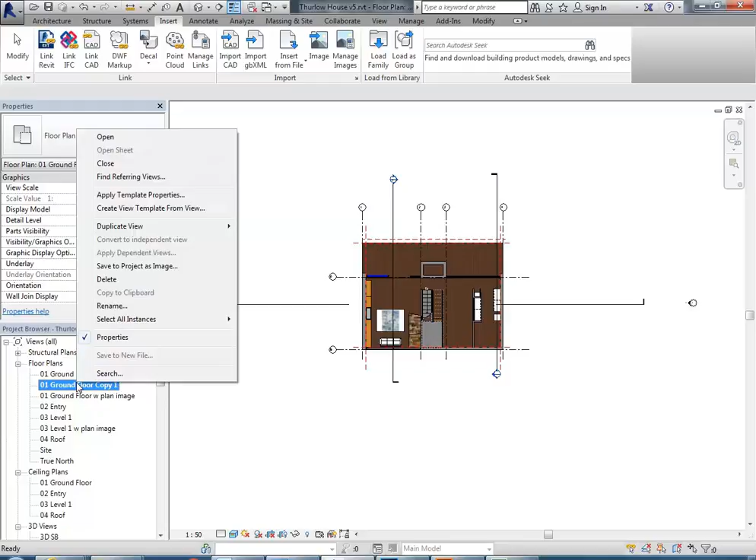So I'm going to right click on my new view name and rename it - why not use a name that is going to work on the sheet. So ground floor plan might be a good one. If you've been wondering if you need to have the view name that shows in your project browser show up on the sheet, you don't. There's an option to have a different name on the sheet to the view name, and I'll show you that as well.

Okay, so I've got my name, and now I'm going to hide - so my grid lines, for example, can be hidden. We don't really need to see those on the plan, so hide in view category.

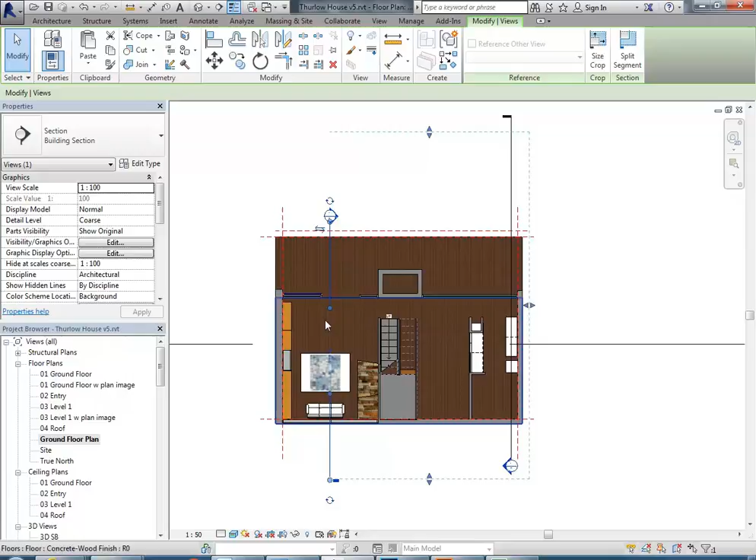My sections, I'll want to keep, so I want to have some sections, and the ones that I'm going to keep, like this one here, I'm going to make look a bit nicer so that they read well on the plan. So just by stretching the grips there to make it look a bit more presentable.

And maybe I'll keep this one as well. So any sections you're going to keep, you should tidy up. And this is important because you don't want section lines sticking out and making the plan way bigger than it needs to be. So you want to get those in close to the edges of your drawing.

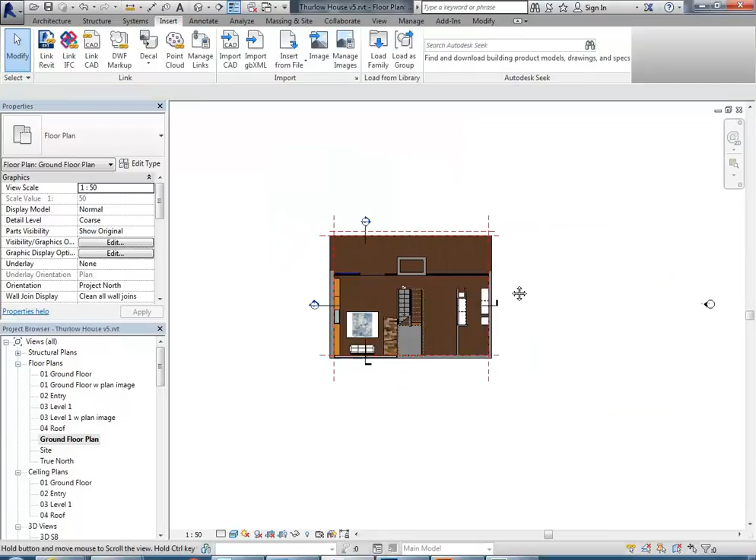And then any sections that you don't need to show on your sheets, you can just hide by hiding in view elements. Now for interiors projects, elevations are very rarely shown on the plan, so you can just hide the whole category for those.

And then my reference planes, they won't print, but again I'm going to hide them just to make the view look cleaner.

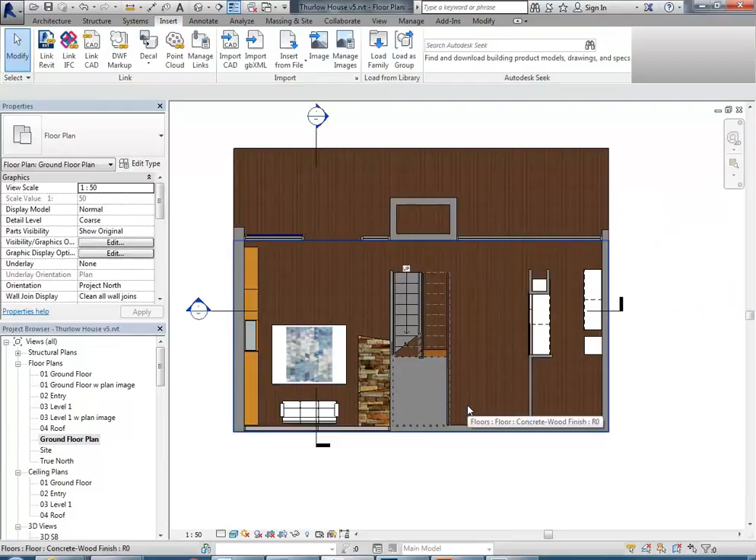A few other little things. You can label in Revit. Now, you can do this in those other programs as well, InDesign, Illustrator, Photoshop, any of those you can do your labeling. But for just simple room labels, Revit isn't bad. But make sure you use the Annotate tab, not the Architecture tab. The Architecture tab has model text, which is basically 3D text. So never use that to do your labels.

Use the text on the Annotate tab. There you've got a text tool, which is just regular text for things like labels. And then over in your properties, you'll see that you have set up a lot of different Arial sizes. I'm pretty sure you'll have come across that Arial font before. Do you know what Arial is?

Yeah, it is a Microsoft thing. It's like a poor man's Helvetica, essentially. So it's a bad rip-off of Helvetica. Unfortunately, you don't get Helvetica on Windows because Apple did a deal with the people who produced that font and stopped them from releasing it more widely. But you can pay for it and easily have it on any Windows platform. It's pretty simple actually, and it doesn't cost you that much. You might even find some free ones, but the ones you pay for are a lot nicer. And it's much nicer than Arial. Arial is a bit of an ordinary font.

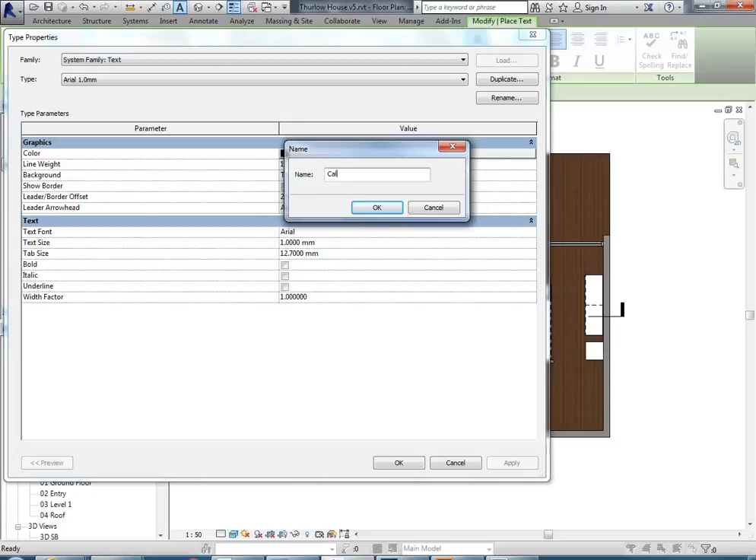So if you go to Edit Type, then you can easily set up any other font. And there are some nice fonts that come with Windows. And so to do that, just go to Duplicate. Anyone know any nice fonts that are better than Arial that you might use? Yeah, Calibri's alright, yep. I don't mind Tahoma, Myriad, there are a few that are good.

So, Times New Roman, yeah. Serif fonts, I don't know, they're good for emphasis, but otherwise, for things like this, I tend to avoid anything with a serif. So that's the tails on the end of the fonts. And it's important for design drawings, you really do need to think about all of these things like your fonts.

I'll say Calibri, and I'm going to make it 3.5 mil. And so I'm going to set the size there, 3.5. You might think, well, why am I spending so much time with text when I'm really trying to get the scale? But you'll see if it's not obvious why scale and text go together in a second. So here I'll set that font, so we'll go with Calibri, that's not a bad one actually.

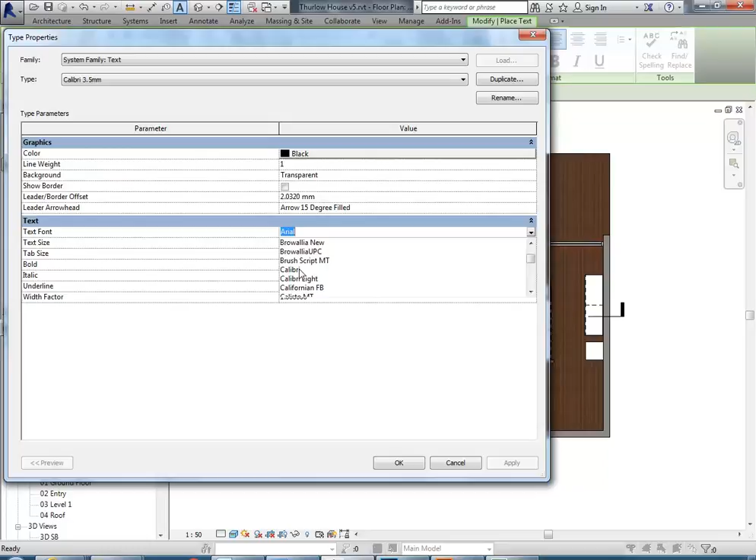Okay, so now I'm just going to do some room labels. I'm going to click to make a rectangle, click and drag. And I'll do another one over here. And then lounge.

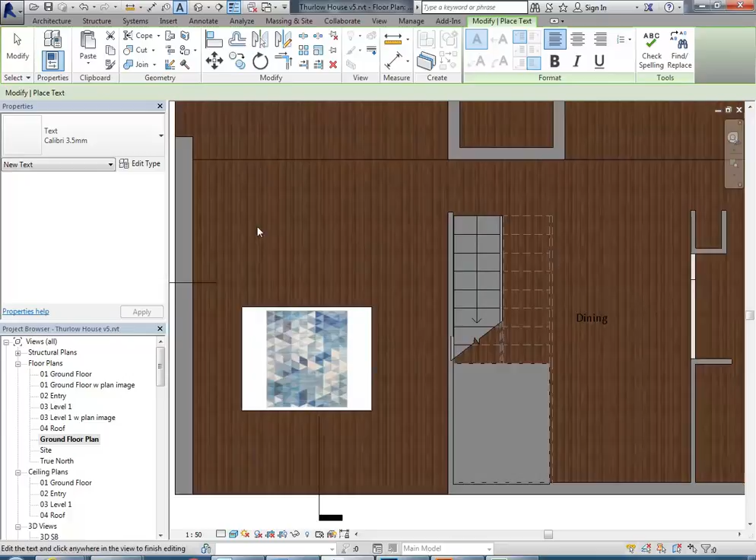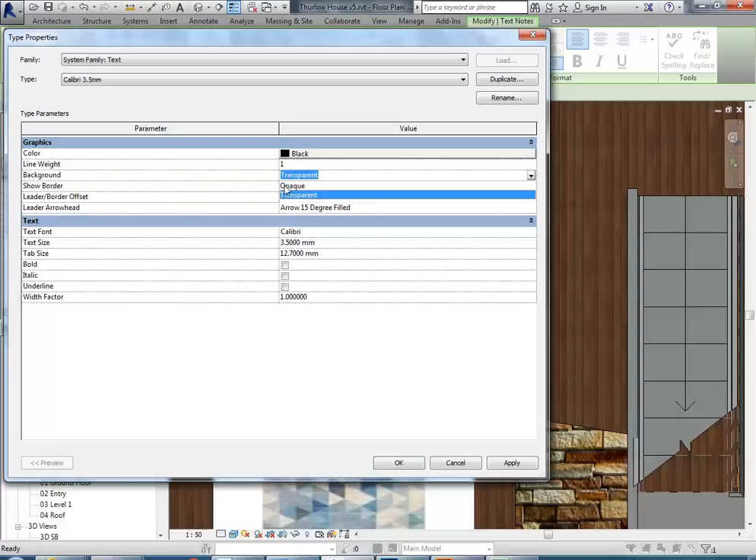Right, so it's a bit hard to read because I don't have a background. So back to Edit Type, and you can turn the background to opaque if you prefer. And then, oops, sorry, just get that text across a bit.

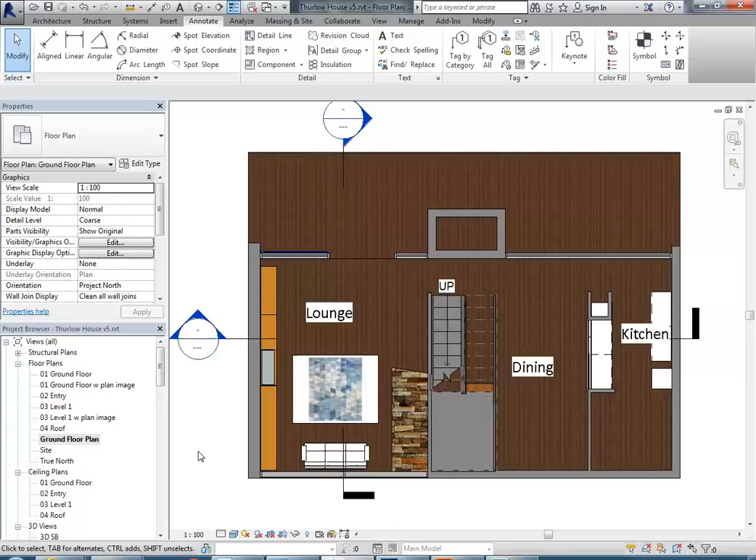Okay, so I'll show you, if it's not clear, if I change the scale now back to 1 to 100, notice how the text changes size. So the text is always going to print the same size, and so if your drawing changes scale, relative to that drawing, the text needs to change size. Because really the plan there is getting bigger. If I make it 1 to 50, the plan's double in each direction. So the text, to print the same size, will appear smaller. But it's important that you realise it's always going to print 3.5 mil, and it's the plan that's actually changing size.

And so it's not a bad idea to do your text for things like labels, like I said, in Revit. But then remember, if you're using a graphics program like even Photoshop, but definitely InDesign or Illustrator, you can do more text in there.

Okay, so I've got my scale, I've got some text, and now it would be an option to print directly from here. If you've got an idea of the size, that is an option. But if you're not entirely comfortable with the size that will be on your page, it can really help you to make a sheet to place it. So I'm going to go down to Sheets All, right click, New Sheet, and you've all done this before, making new sheets. I can go to Load, and then you'll see in the title blocks folder here, so in the Revit library on the P drive, title blocks, I've made some blank sheets for you.

Title blocks can be extremely useful with Revit, but people forget that for design drawings and presentation drawings especially, you often don't want a technical looking title block. That's a common mistake people make when using Revit - they just use the stuff that's in the library, which can be far too technical for a design drawing. But it's still useful to have the page size set up with your sheet.

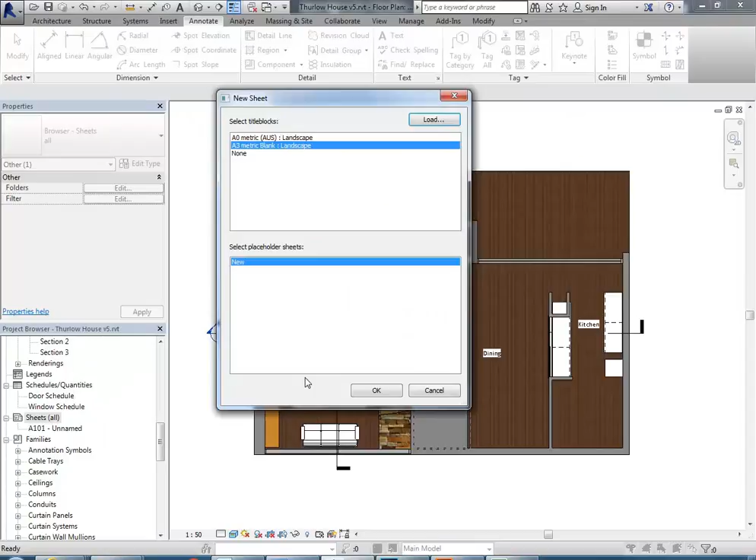Okay, so I've got a blank A3 page. Now I can go back to my project browser and find my ground floor plan, drag that across, and see how that's going to fit on an A3 page. More importantly, I've located it on that page, so if I now take it into another program, it's always going to be in the same position. That's really important when you do lots of rendering and overlays on top of your drawings, otherwise you have to line it up again every time.

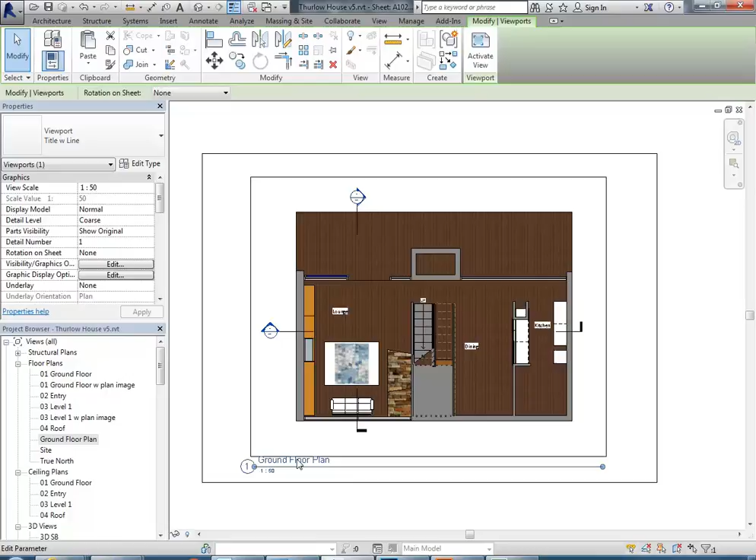So now I'm going to select that plan and even take the tag off. The tags in Revit, even those are just too technical - you can do much nicer, cleaner tags. If you're not sure, look at the graphics in a lot of design magazines, and you'll see they don't have these really technical looking tags. They've just got very clean labels, often all lowercase, with a nice font, and it's got more than enough description, but looks much more design oriented than these technical looking things. So I'm going to set that to no title in properties.

Maybe just to give you a few other little tips. If you want that to look nicer, the graphics out of Revit are okay, but you can definitely improve on them. I'm going to turn shadows on. Shadows can be nice, but by default they'll cast out of your building onto the ground. You might not want that, so you can go to sun settings and simply turn the ground plane off, click OK, and now I've just got shadows inside the plan.

Now, on my screen that actually looks much lighter, and I know on the projector it looks really dark. So I'm going to go to graphic display options by clicking on the little view cube, on the shading cube, and then there are a few options you can play with there.

One is lighting, so I'm going to maybe turn the sun up, but also ambient light - I'm going to bring that light up. Notice how that's really lightened the drawing. I can also tone the shadows down.

Then in shadows you have the option to use ambient shadows, which can add just an extra level of realism. It can be a little bit subtle in a plan, but they do make a difference. And then exposure is another one you can play with.

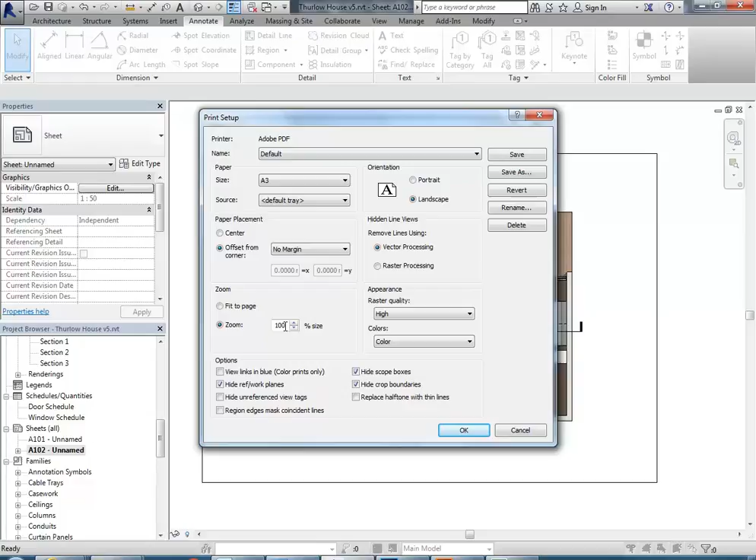You should be doing this every time you print. You should be checking this one, the zoom setting. If it's not on that, fit to page, it's going to scale it. So make sure that's on zoom 100%. That means the 100% means that it's the size that you've set, instead of changing it to the page you've set.

So I'm going to preview this, and I shouldn't see the borders, but I can see there an A3 page, and it fits perfectly. So I'm going to click OK.

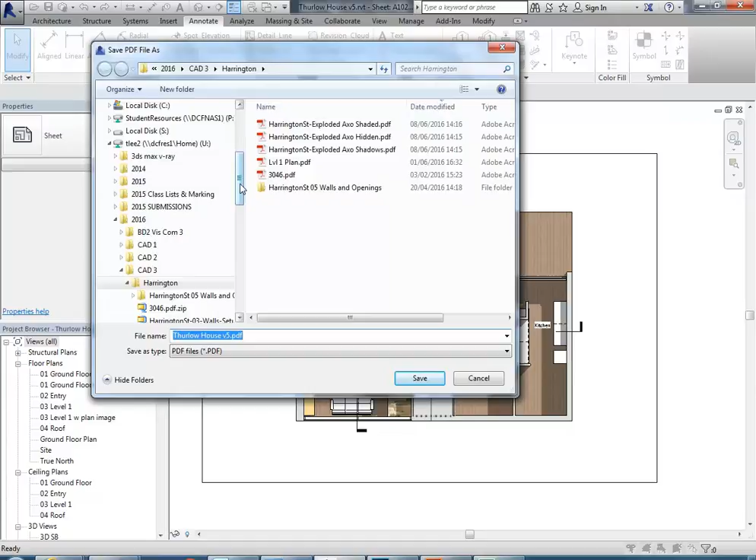And what am I going to call it? Thurlow House ground floor plan.

Right, now notice how that's got shading. What if you don't want any shadows or shading? You want to do all of that in Photoshop?

So another quick little option. If you select the view on the sheet, you can go to Activate View to get all of the view controls up again, just like working in model space in AutoCAD.

So there, I'm going to set it to hidden line, and I'm also going to turn shadows off. And then I will right click, deactivate view, and then go to print again.

I'll check the preview just to be sure. Right, so there it is, it's exactly the same, except I've turned all of the shading off, both the shaded mode but also the shadows. That's really important.

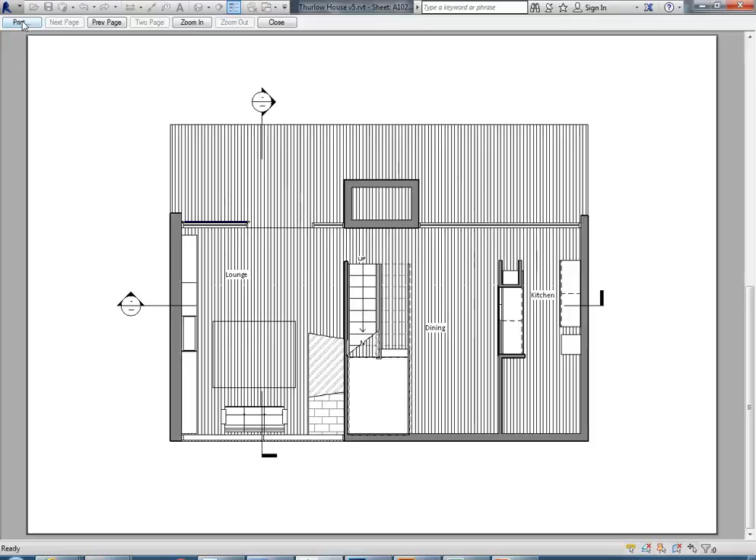And I'm just going to click OK and give this a different name. We're going to call it floor plan lines.

And so now I'm going to open both of those in Photoshop just to show you the difference. Okay, so if you haven't been doing much graphics work, you should start with Photoshop and then work your way up to InDesign and then Illustrator.

Okay, so these are my two PDF files. I'll start with the shaded one. Here you shouldn't need to change anything, just click OK to accept the default settings. Okay, so it opens in Photoshop in a pretty similar way to what we saw in Revit.

But I'll open the other one, just so you can see the difference. So this is the one with just the lines. And, no, sorry, that's not right.

So let's just check what I've done there. I had ambient shadows still on. Yeah, okay, so that was a mistake. Okay, so I'll do that again.

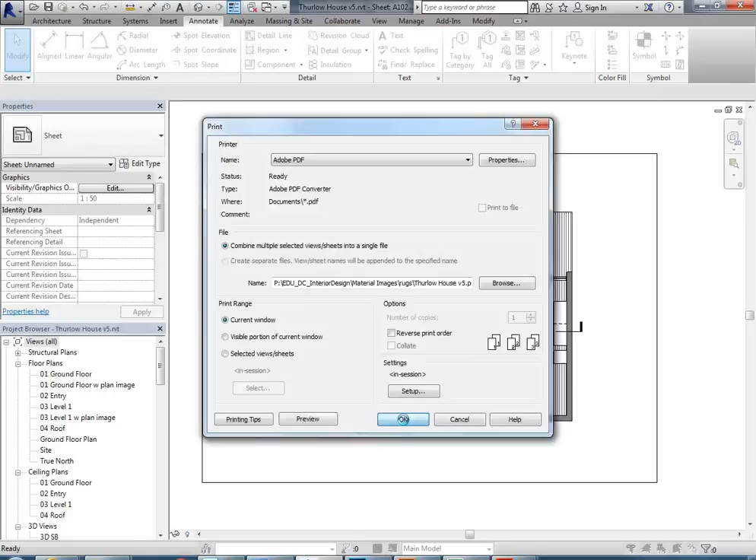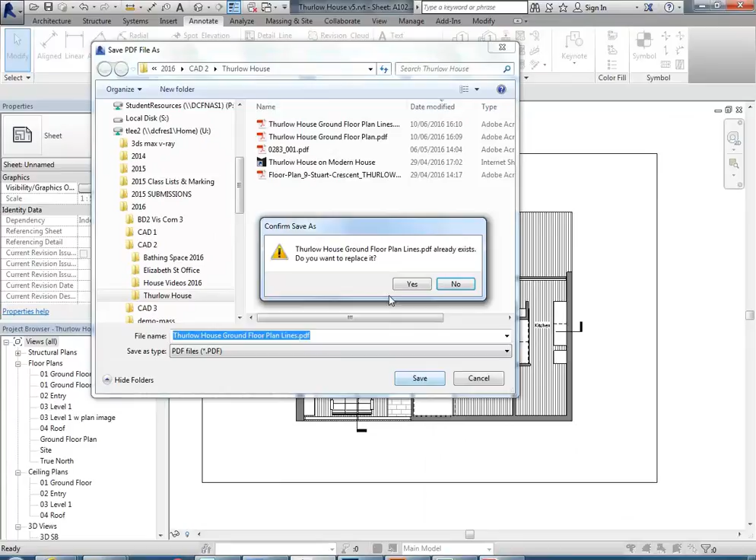So I just have to close that file. It's still open. Okay, so let's try that again.

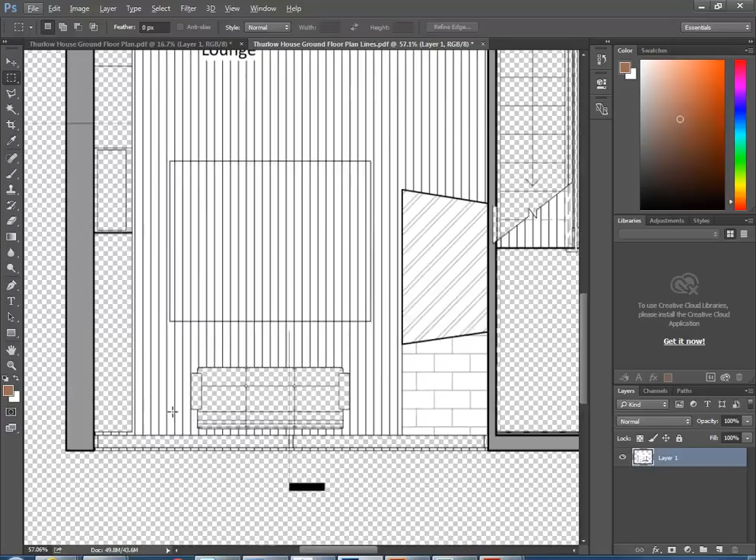There we go. Okay, so notice how it's got transparency. So that means where the checker pattern is, it's cut out automatically. Now that timber pattern unfortunately is coming in fill, so I'd have to go around that, but I just want to show you that anyway.

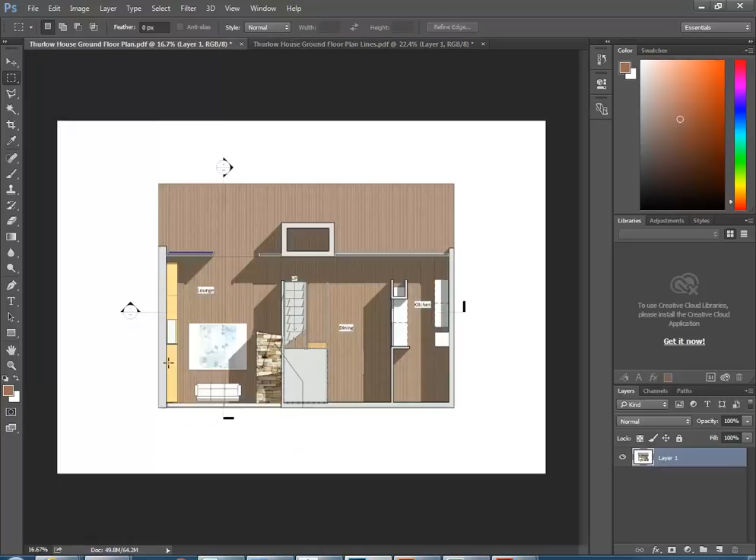Sometimes that can be really helpful if you just want the line work without the shading. I think probably at this stage you'll want to go for the ones that have the background, but you might see this come up by mistake. So if it happens, if you see the checker pattern, it's not a bad thing.

And if you want to show it with a background, an easy way is to make a new layer, drag it to the bottom, and then just go to the edit menu, choose fill, and set it to white. And that can make it easier to look at.

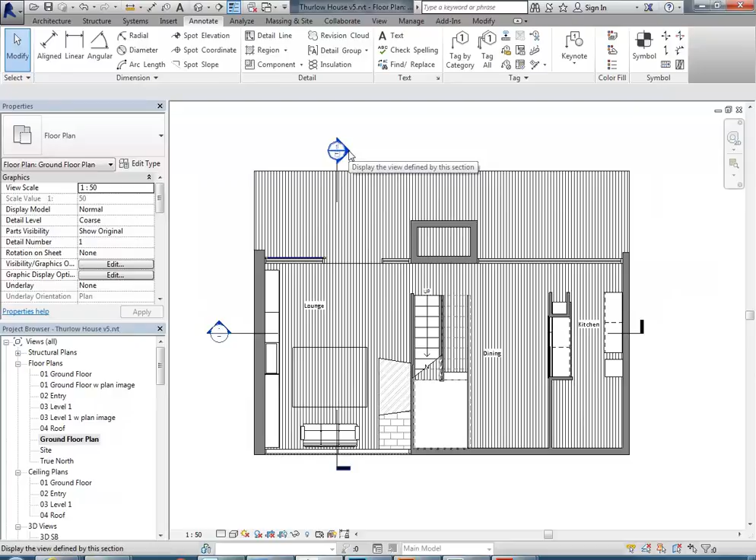Okay, so let's do some more drawings at scale. So, that's what I'll do next. So I'll do a section now. And so I'm going to use the sections that I've set up. So I've got this section here. And so it's a bit of a mess.

For a start, you generally don't need to show other section references in your section view, so you can just hide that whole category.

Levels are useful, but again, the way Revit does them is a little bit too technical. So start by hiding any levels you don't need.

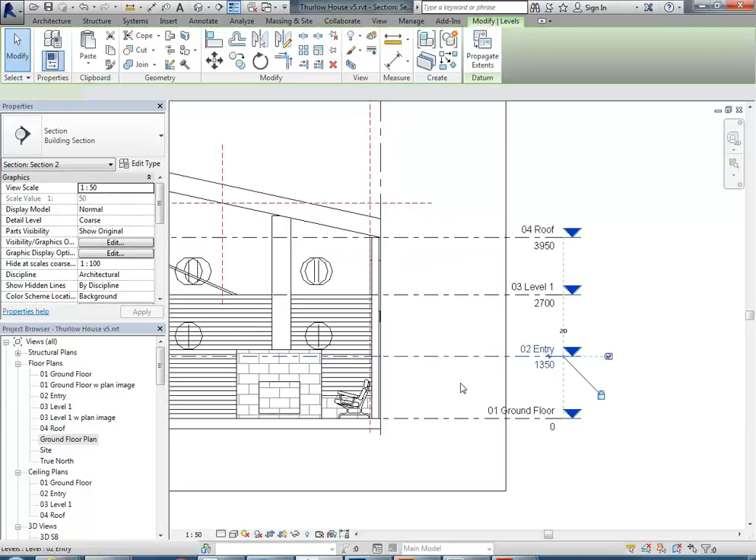So we don't really need a level for the entry to show in our section drawing, so I can just hide that by element. And I don't need a roof level either. We need it for modelling, but we don't need to show it in the drawing, so I'm going to hide that too.

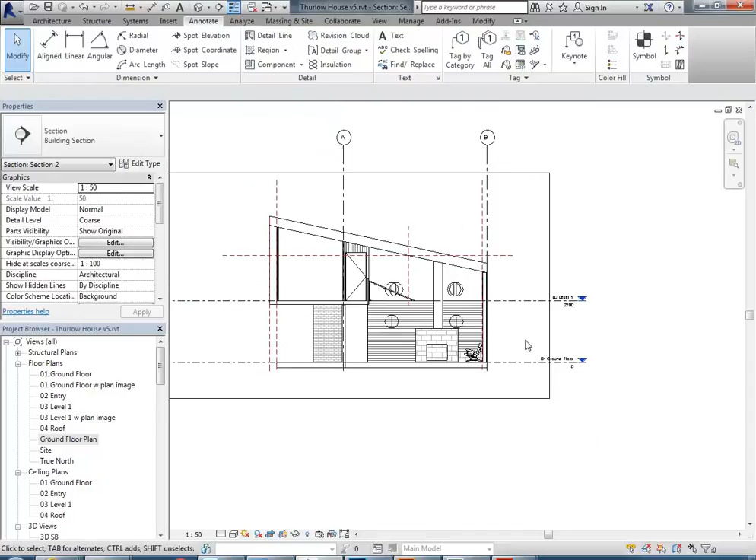So you really only need to show levels for your main floor levels. And so that's going to be ground floor and level 1. That's all you should need. Now they also don't need to be as long as that, so I can stretch them right back closer to the building.

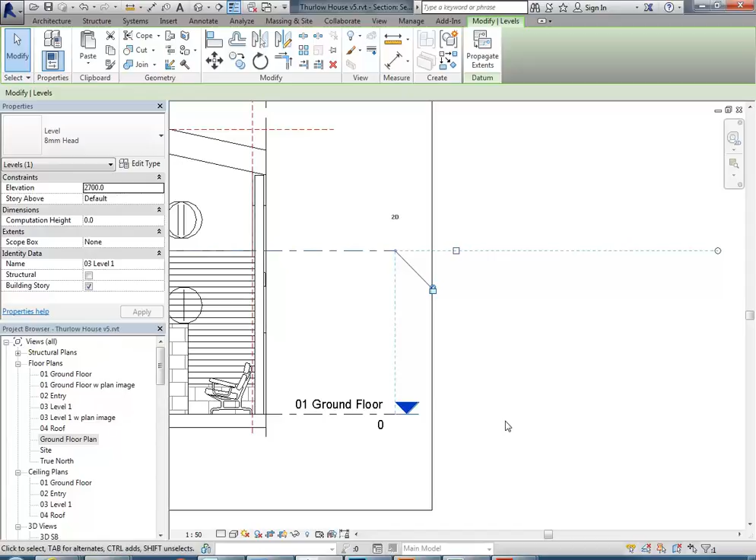The tags are just a bit too technical, so you can always turn off the bubble at the end just by clicking on that tick box. I'm going to select my next level, and again just turn the tick box off, so all I'm left with is a line, so I know where the level is, and when I'm in my graphics program I can do the labels in a more clean graphical style.

So then all those other things like reference planes and grids can be hidden, so I'm just going to hide that whole category. Don't need to show lights either, so I'm going to hide that category too.

Right, so much cleaner. Then don't forget about your crop region - that's really important for section views. This box that goes around the section first needs to be visible. If you can't see it, it's probably not on, so you need to make sure you click on that button down the bottom, which is hide and show crop region, so you can see that box around your section.

And that way you can bring it in as close as possible to the section without crossing over anything. Bring it right in, because you need that section view defined. So that box sets up the size of the view, but then you'll usually want to hide it after that. You need to first be able to see it so you can set the size, and then use that button again to hide it.

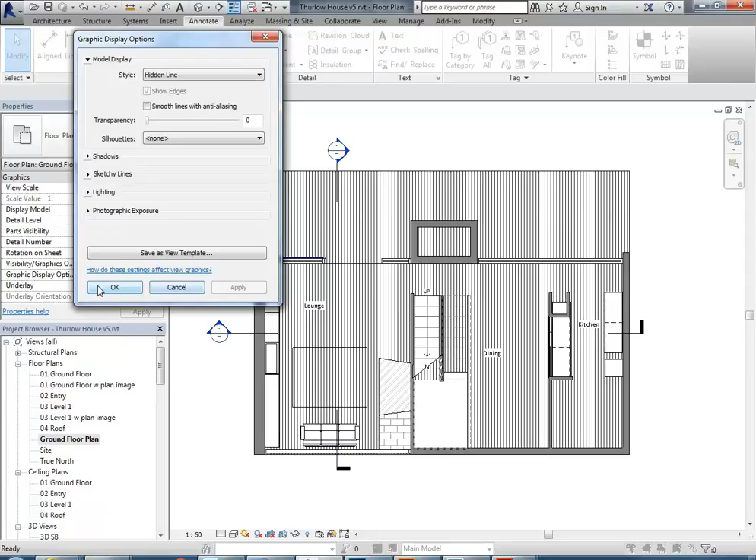Now, just like the plan view, I can set up the graphics, the way I had them before, with all of those view properties.

So to save doing that over and over again, you can save those view properties. I'm going to right click and go to create view template from view, and I'll call this... plan graphics. Click OK.

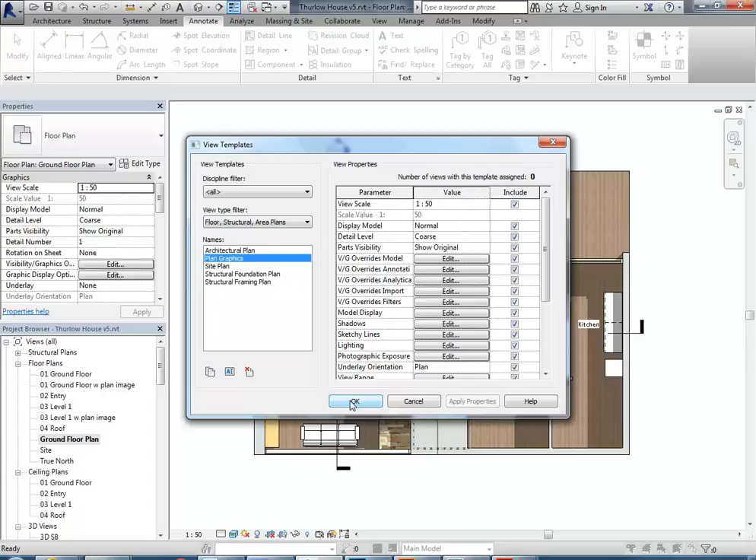Now I'm going to go to my section view again. It's really important you realize I didn't duplicate the section. It's good to duplicate views like plans because they're not being referenced by anything, but try to avoid duplicating views like sections - it'll really cause a lot of problems. So just change the view itself.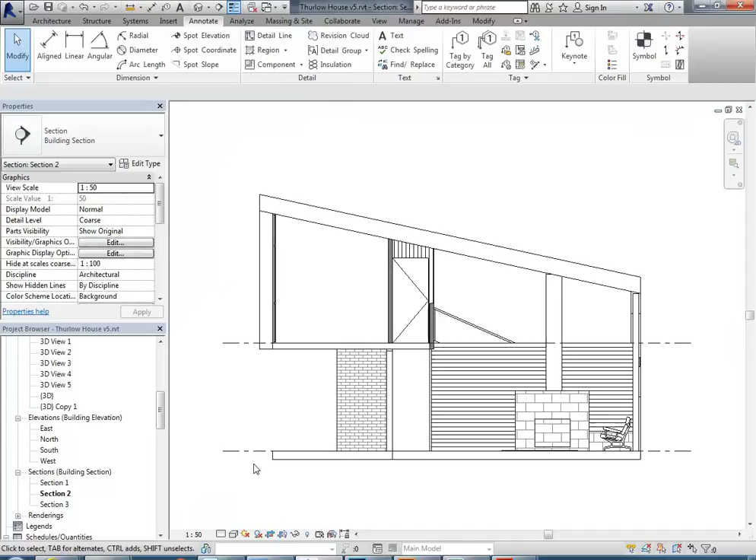Okay, so now I'm going to right click on my section view name, section 2, and then apply template properties. There, it's got view type filter - I'm going to set that to all, so then I can find plan graphics. Click OK.

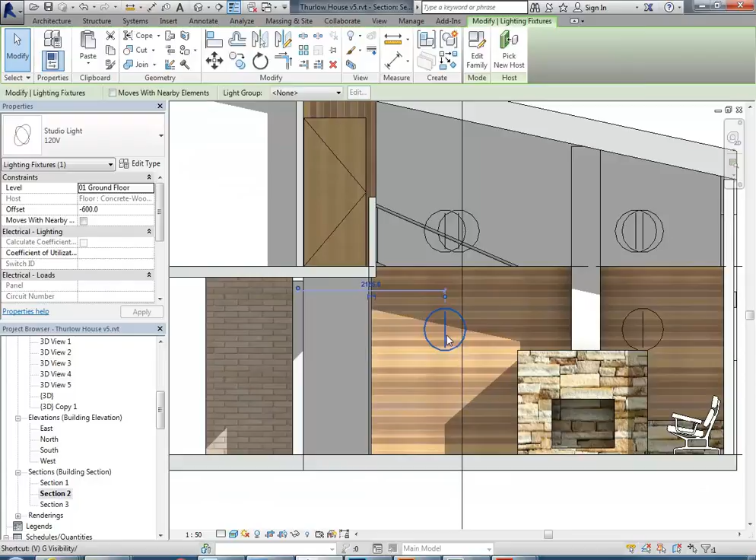Okay, so that's set the same graphics I had for the plan in my section. Unfortunately, it's brought the light back because I had the lights showing in the plan view, so I can just go and hide those. I'll use the shortcut this time, which is VG.

So there we are, that's okay, but maybe the sun direction isn't quite right, so I'm going to go to sun settings, and here you can probably just switch between top left and top right for views like this. So that might be okay. My section has come up again, so I'm going to hide that too. Okay, so that's ready to go onto a sheet.

So just like before, I'll make a new sheet with the same blank A3 title block, and then drag my section onto the page. And again, set it to no title.

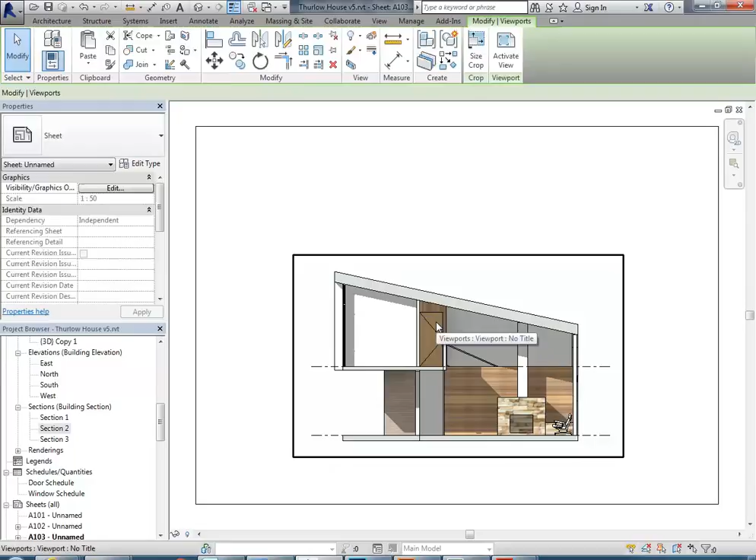Okay, so then I might want to have some isometric views or axonometric views set up to scale as well. So I'll just show you those.

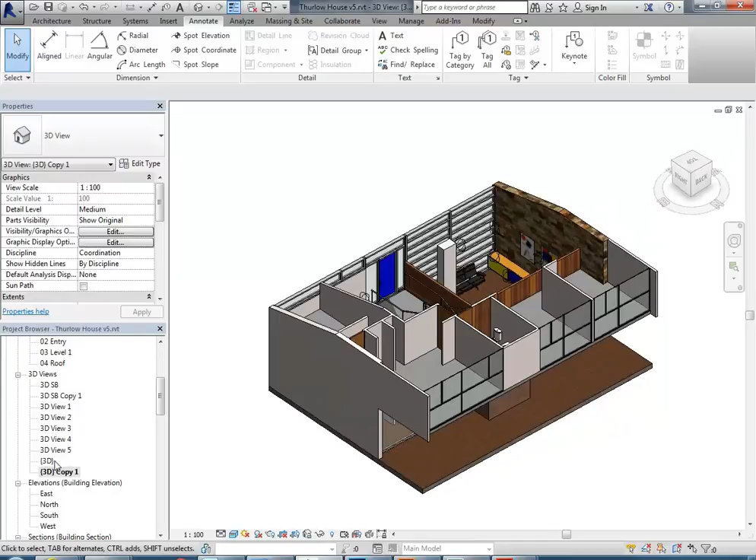Okay, so I've got here a view that's already got a section box. I might start from scratch just to go over that again. So there we've got the default 3D view showing the whole building. I'm going to right click on that and duplicate, and then I'll right click on my new view name and go to rename. I'm going to call this ground floor, and I'm going to use the proper name this time, axonometric.

Okay, so do you know what makes it an axonometric? Yeah, the angle - which angle? Yeah, you're looking from above, and then there's something that's always vertical. So you've got a vertical axis for anything in the Z direction. This axis is always vertical. That's how you remember it's an axonometric, because that axis stays vertical no matter what. And that's what makes it different to an isometric. In an isometric, the angles are equal, but in an axonometric, you can have any angle for the other axes, but that Z-axis always has to be vertical.

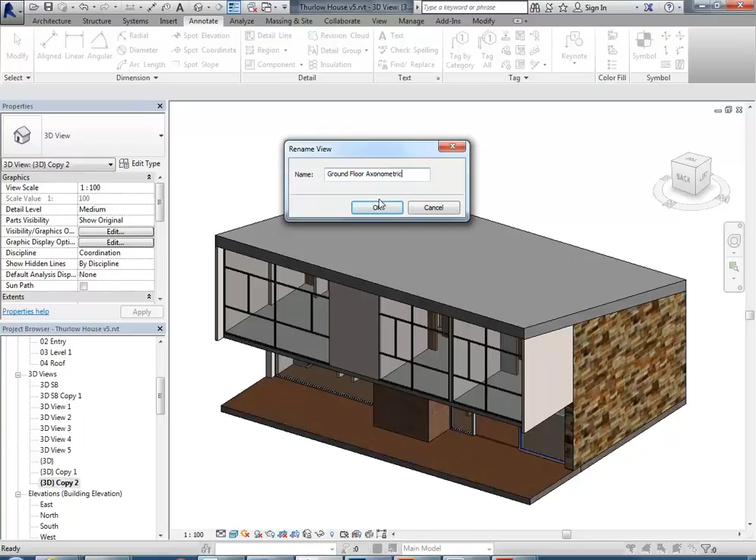Okay, so I've got my angle, and now I want to cut away the things that I don't need using section box.

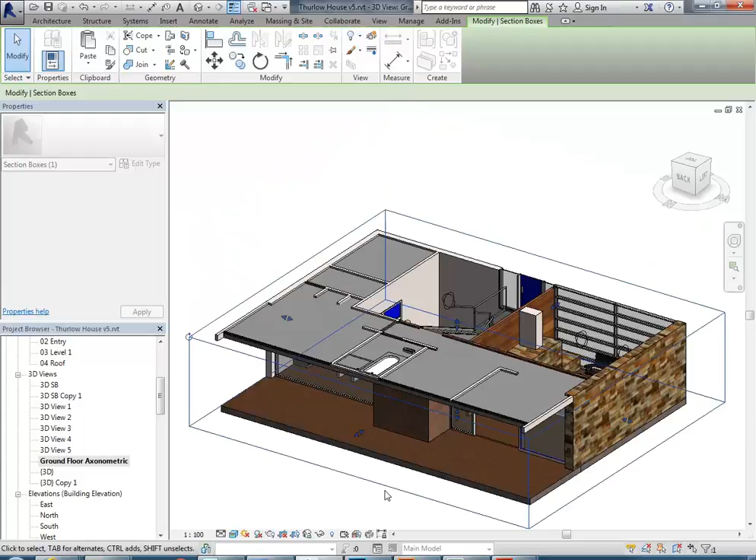And then I'll bring that down to cut away and show just the ground floor. Maybe orbit a bit to get a view from above, and then hide the section box.

Okay, so it'd be nice to put a railing on there, but I don't need to go and do that right away, because remember, if you set the views up, as you make changes to the model, it's going to propagate through to all of your views. That's something I think people maybe don't quite grasp at first, that you can do most of this work at an early stage. You don't need to have everything done before you set up your views and take it into Photoshop.

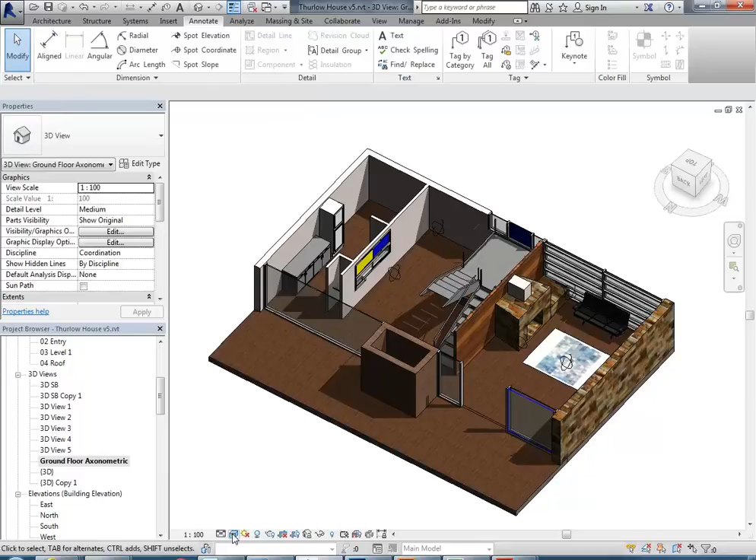Okay, so I've got my basic setup, but I might also have some shadows. Again, go into sun settings, turn off the ground plane, and then just play with the graphics to get some better lighting.

Okay, so that's all right. Okay, so that's ready to go on the page. The scale for this is 1 to 100, so it'll be smaller than the section, but that's okay as long as I know.

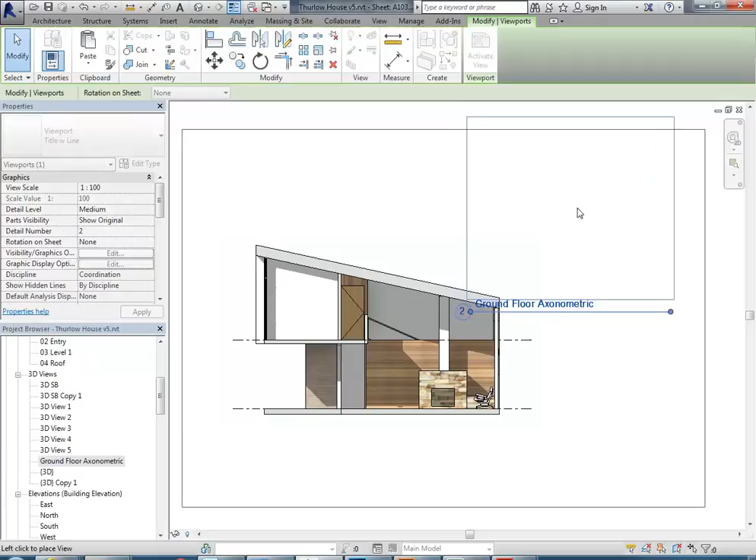So the isometric views have a scale just like sections, plans and elevations. Let's place this to one side, get the section out of the way.

And so, just like the other views, I can set the tag to no title, the viewport tag to no title. And again, think about doing the labelling in Photoshop or another program.

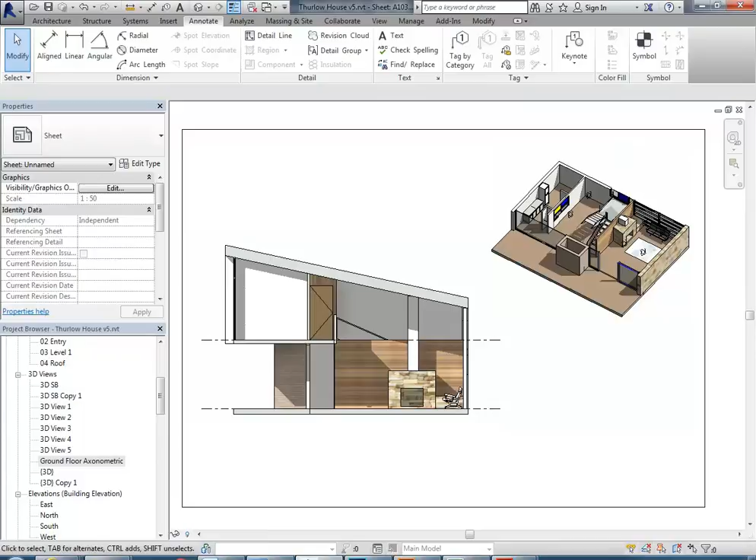Okay, so now I'm going to show you an option that I don't think you've seen before. I want to keep that angle the same no matter what, so I'm going to lock it with this button down here. You'll see next to the glasses there's an option to lock the view, save orientation and lock view, which means that view angle can't change, which is really important if you want to keep the same angle for later when you bring it into other programs. That's really helpful.

Okay, so now I'm going to duplicate this view and rename my new view first floor, or level 1 axonometric.

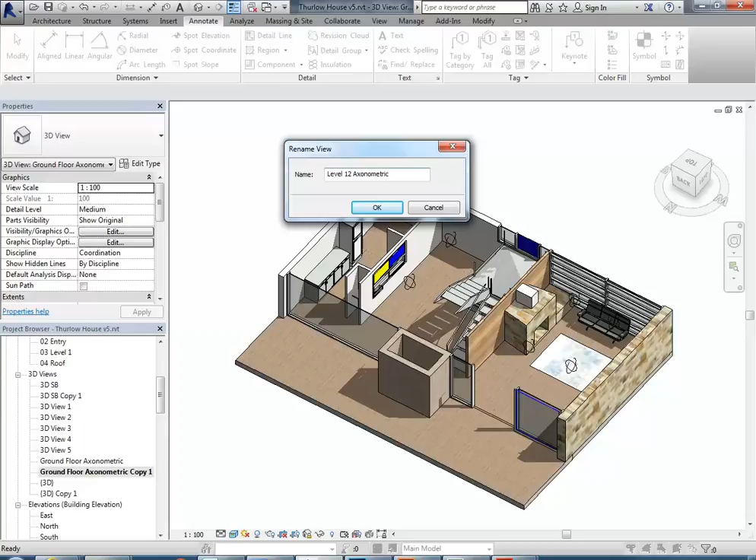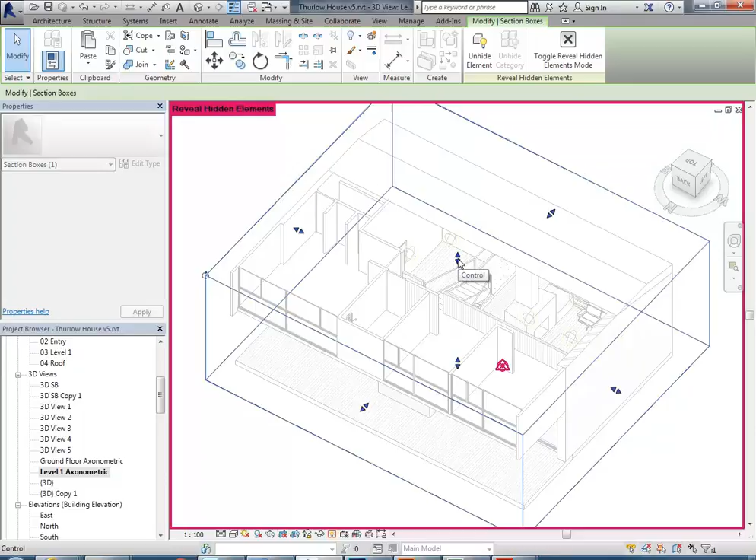I'm going to click on the little light bulb to show my section box again and bring that up higher so that I can then see my first floor layout. Okay, so that might be good. Maybe even a little bit higher. Now I'm getting some of the roof coming in there. That's okay, I can easily hide that just normally. And again, I'm going to hide all of my lights.

Okay, so that view is ready to go. So I can then go back into the sheet. I'm going to drag this one down below. You'll see why in a second.

And then I can place level 1 axonometric above, and notice how it should line up automatically. If you miss that, when you're dragging it across, you'll get a dashed line to show you when it's projecting from the view below. That way your two views should line up across the levels.

Set this one again to no title. Okay, so it's taking a minute for the graphics to update, but there we are.

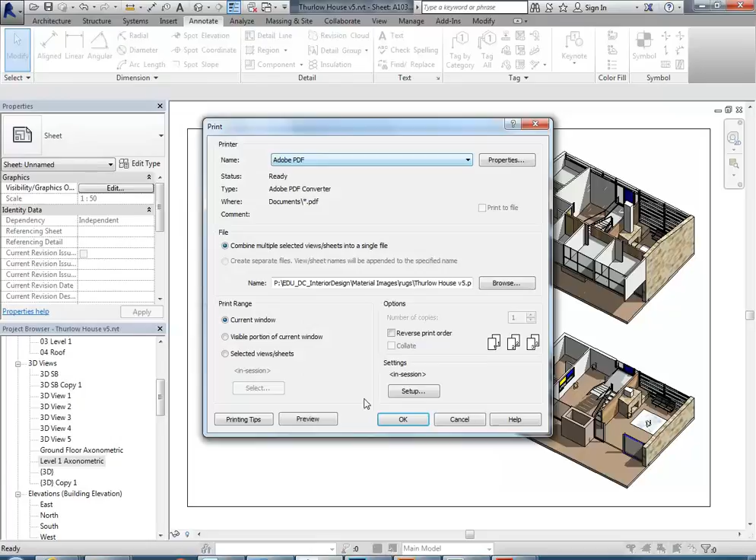Okay, so that could also be brought into Photoshop the same way. So just like the other drawing, I can print to PDF. Again, it will remain with the same settings, but if you open the file again, it's still worth checking these, especially the zoom, but also the page size.

So, Thurlow House section, like so.

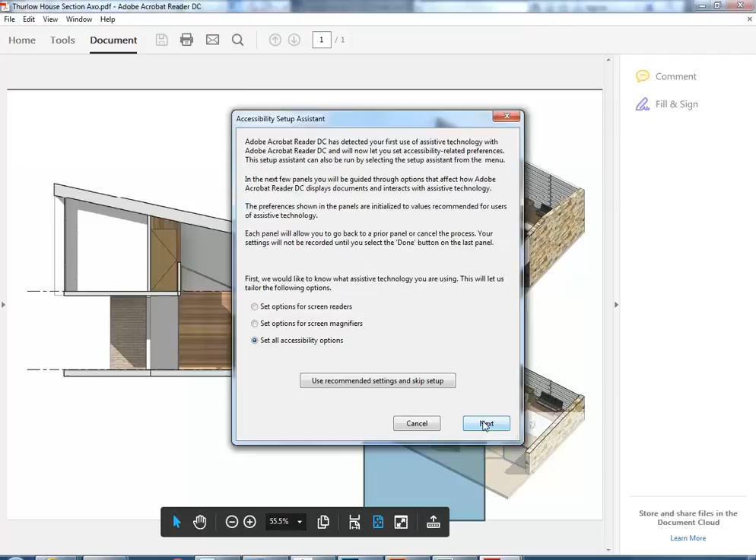Okay, so if we open that in Acrobat Reader, there's something going on with the masking there. That's a bit weird. Yeah, I might just make that one again. That's not right. Shouldn't do that.

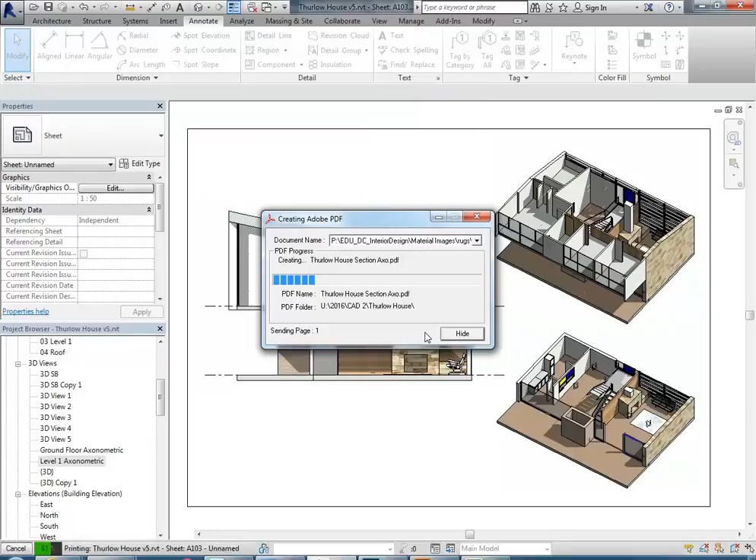Okay, but does that make sense when you make these views? Other than that masking, which is a real error, I don't know what's happening there. Might just place that view on again.

It's because they're overlapping, I see. Okay. Okay, no, I know what's happening actually. Okay, so...

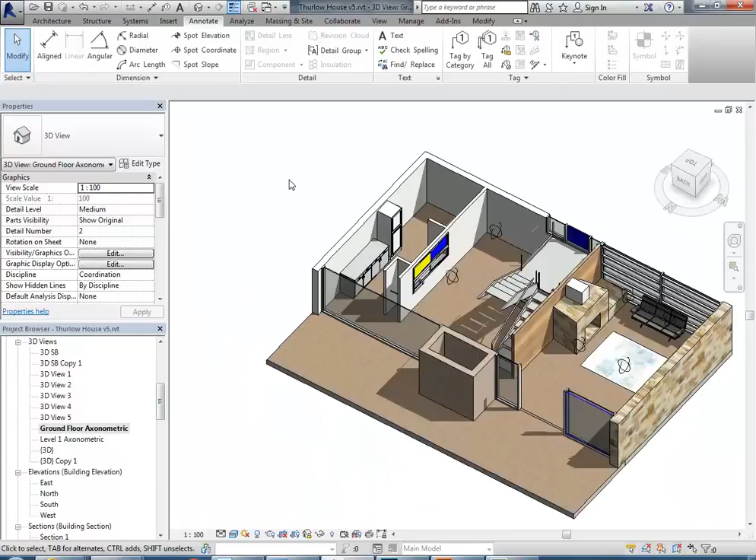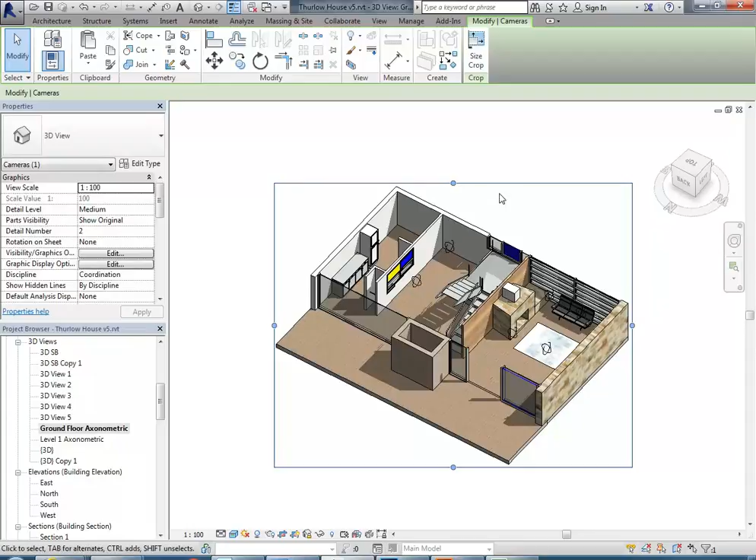Remember before I said you need to check your crop region. So if you see something like that, check your crop region, and you can see there that's fairly large, so I'm going to bring that in closer to the view. This is like your viewport in AutoCAD, and it's one of the most common issues people have with Revit, actually not thinking about that view size, and then having issues with the size of the view on the sheet.

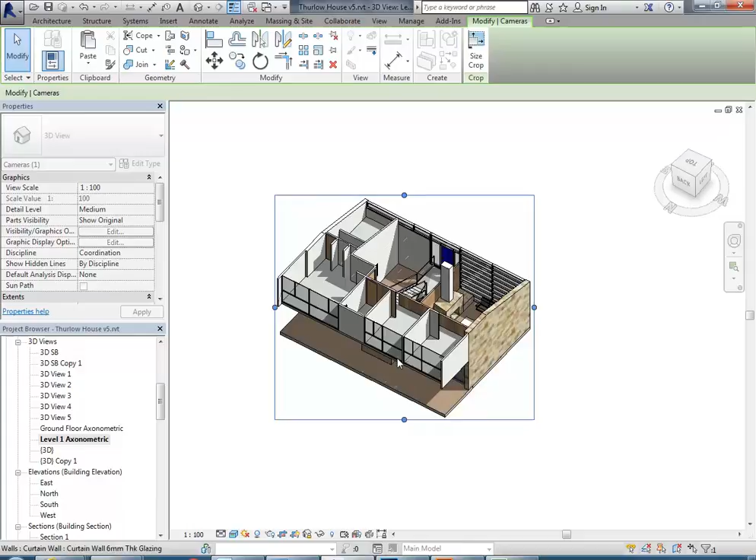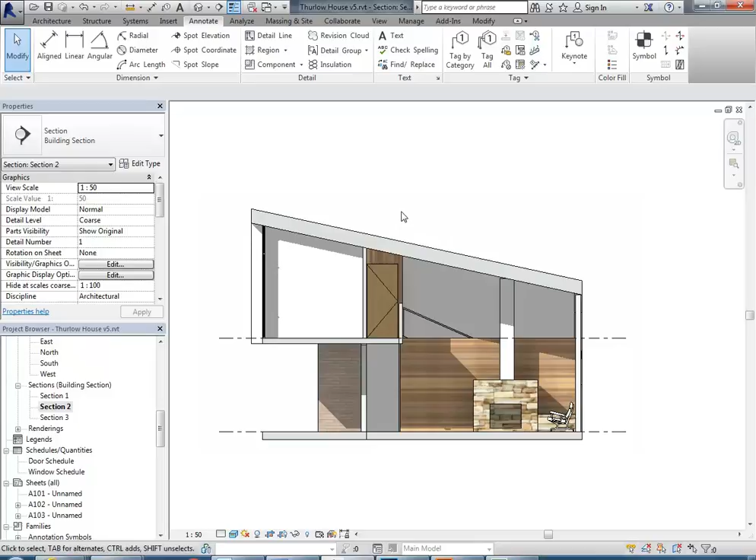So you should be trying this sooner rather than later. The common mistake people make is doing all of the design work and then doing the presentation at the end, and you'll often end up working on elements that aren't going to be seen in your final presentation, instead of focusing on what people are actually going to see, which is the stuff on the page.

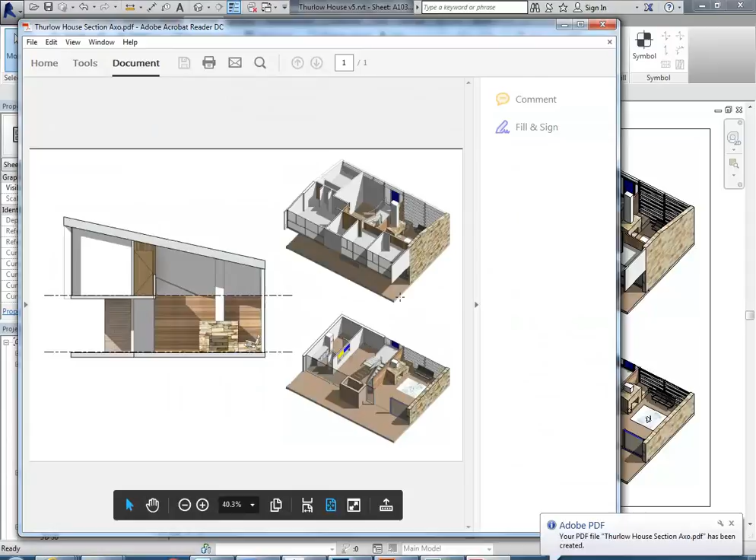So going to the layout again there, I'll put the level 1 axo in. There we go, okay, so that should be right now. There we are, okay, so that is graphically correct now.

And in Photoshop you can open it and add to it. Considering it seems like not many people have been using the graphics software, I might just show you how to do this in Photoshop. It's only A3, so it's fine to do it in Photoshop. The text tools are really easy to use in Photoshop, so using the text tool here, I can add in things like the labels for levels.

So instead of having the big tag that you get in Revit, just use a number 1. Using the text tool there, you can easily edit your text. I don't know why it was set to that colour - okay, so I want that to be black. And maybe it could be bigger than 12 point, since we shouldn't be on a sheet like this. 12 point should be okay, but okay.

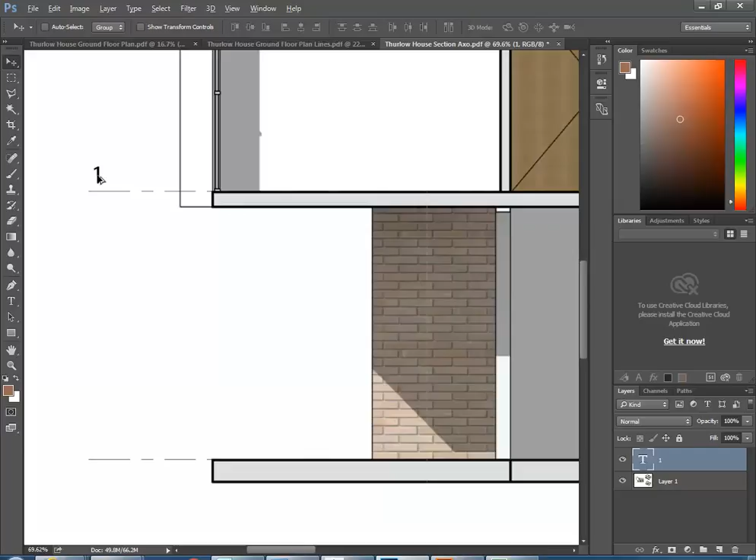So then there we are - I've just copied that, and if you haven't used the shortcut to copy before, it's Alt in Photoshop. So if I select or click onto that text and then drag with Alt, that'll give me a copy. And then using the text tool, I can change that to a G - in lowercase, g might even be nicer.

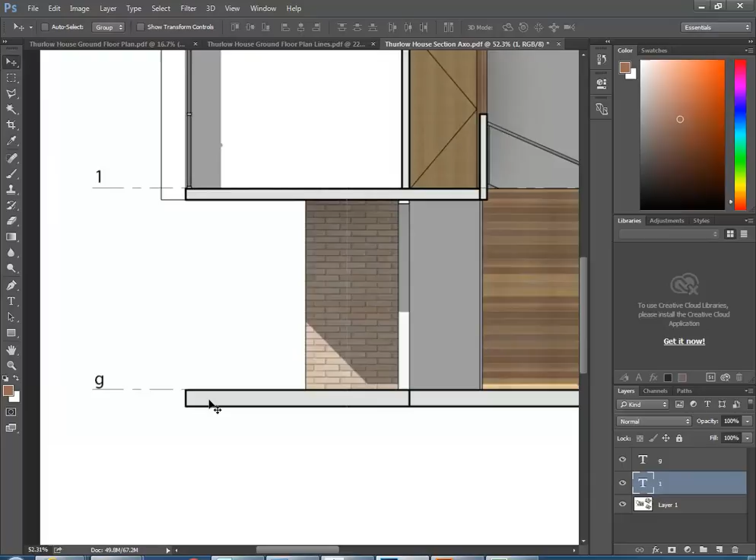So that's often all you want for your tags, not these big, long, overblown titles that you get with Revit. It might be better to do most of the other labels with Photoshop as well. If it's A3, you can even do your legends and all those other things, basically all of your graphics in Photoshop - so don't worry about Illustrator or InDesign.

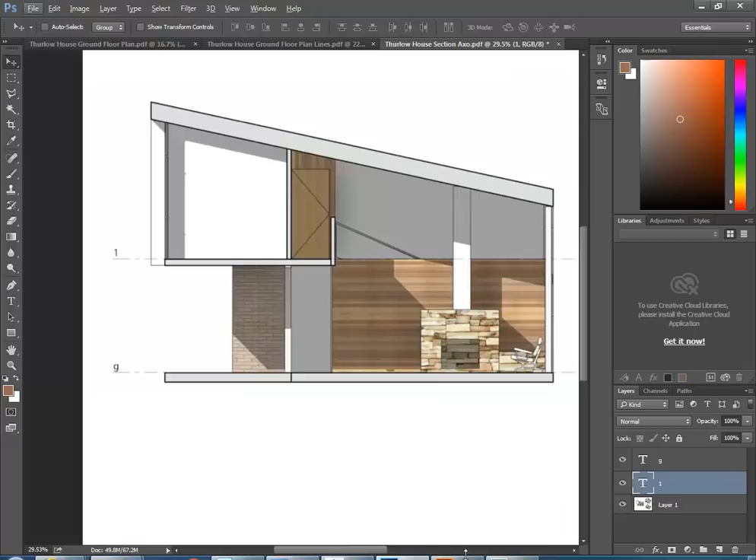So there you've used at scale, but then what about your perspectives? How have you been setting the size of your perspective views? It's good to know how to set your size - so when you draw, how do you set the size of your perspectives? Don't know?

Okay, so when you're drawing by hand, how are you setting the size of your perspectives? Are you using your picture planes to project off your plan? Oh right, so you just... see, computers, they let you cheat. It's good to start off that way, but after a while you want to be thinking about how to do things more precisely, because that's real.

It's for design drawings, that is the main skill, and in architecture we do this in first year - everyone, in their first design subject, has to do this, so you should be doing it before long. Whenever you set up a perspective view, you should know how big the perspective needs to be. That's really important. Sometimes you can draw them bigger than they need to be if you need more detail, and then reduce them - that's a good technique. But you should never draw it smaller than it needs to be and scale it up, because they just look awful. That's fine if you're doing that.

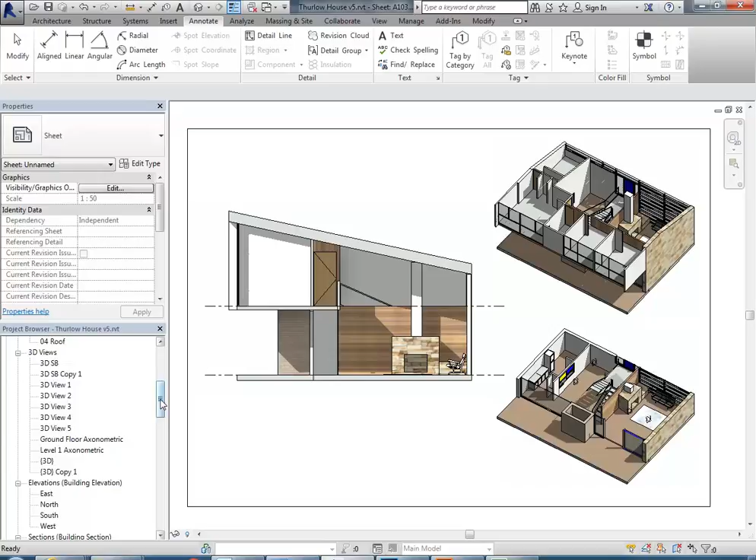So, same in Revit - you need to know how big your perspective needs to be in the end. It's quite easy once you know how, you just need to know why it's important, otherwise it can all seem a bit esoteric. So I've got a perspective view here - how big do you think that should be on a page? Forget the fact that it's not a very good perspective, it's a 2-point that maybe is a bit off anyway, but let's just say I'm going to use it. If it needs to go on an A3 page, how big would that view have to be, just roughly?

Yeah, that's fine. So let's go for that size. To get the size, it's not like other views, because other views have a scale: 1 to 100, 1 to 50, 1 to 20. Perspectives don't have a scale.

So to get the size for a perspective view, you click onto the border and then size crop. This is essential. When you set your perspective views, you need to know how to set the size, and you always get that in a perspective through size crop.

Remember before we looked at using the cone of vision to change the field of view, to stretch the view out. That's the first option there, field of view. We're not doing that - we're just trying to change the overall size of the view. We don't want the field of view to change. So you've got to make sure you remember to change it to scale here.

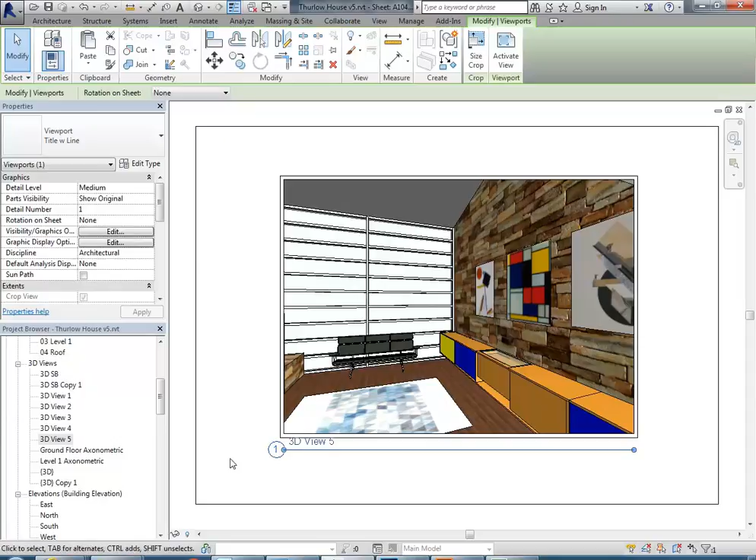This doesn't just affect these shaded views, but also your rendering. So if you've been setting up your renders and then finding that when you set them to printer and make it 300 dpi, it's taking a long time, you can save yourselves a lot of time. If you know maybe this view only needs to take up a quarter of an A3 page - and quite often they will - if you're doing your final sheets in A3, you might have some sheets where you've got a few perspectives on the page.

Are you trying to get all your perspectives to take up a whole page? Look, it's good to have some hero shots, but it's also good to have some more detailed shots where they don't need to be as big. That's a common approach to layouts. I'll just quickly show you some layout stuff.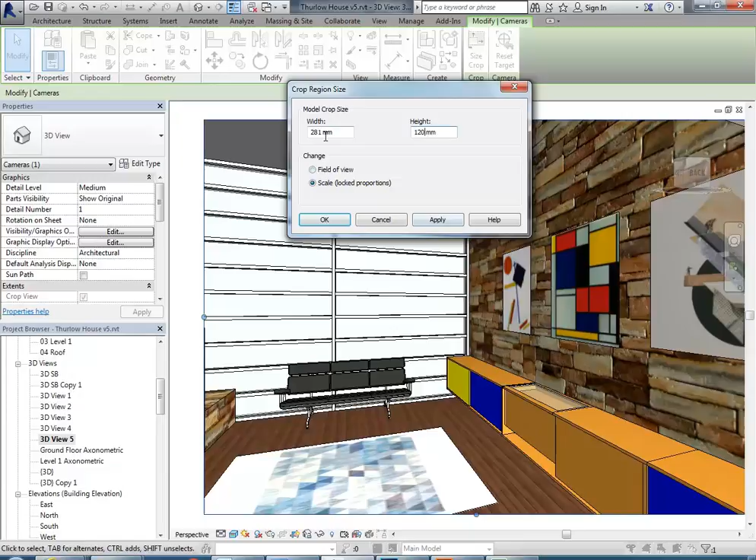Okay, back onto my page. So I can fit four of those easily onto this page. And then notice when I go to render, it's a lot less pixels - if you work it out, it's a quarter the pixels, so that's a quarter the render time you'd have if you leave it on the initial size.

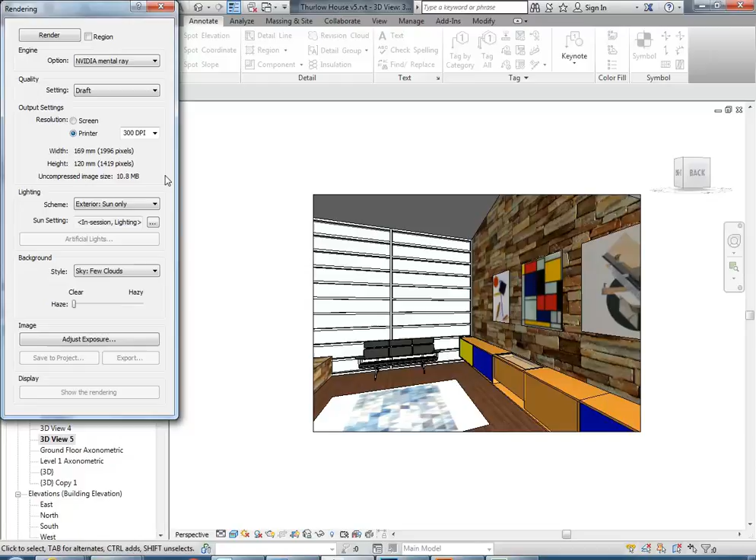That's why sometimes at first the renders will take far longer than they need to, because you might be leaving the views too big. Even though you're doing all the same settings as I've got here, the initial view size you're starting with is much bigger. That can save you hours of render time. But you've got to know about this stuff, so that's why.

So don't forget that one. You've got the image size there, which determines the number of pixels based on your resolution. So resolution together with the size there in millimeters makes up that total pixel dimension. And you can set it all up in shaded even before you render.

Okay, so that's it. The final thing I said I'd show you is how to get that decal cut out - this is just a little Photoshop thing to finish off. So I've been working with the layouts, and like I was saying, for this project I'd suggest you just create your layouts in Photoshop if it's only A3.

Anyone any idea why you might use InDesign or Illustrator for larger pages? Yeah? Kind of, yes, you're on the right track. It's to do with pixels.

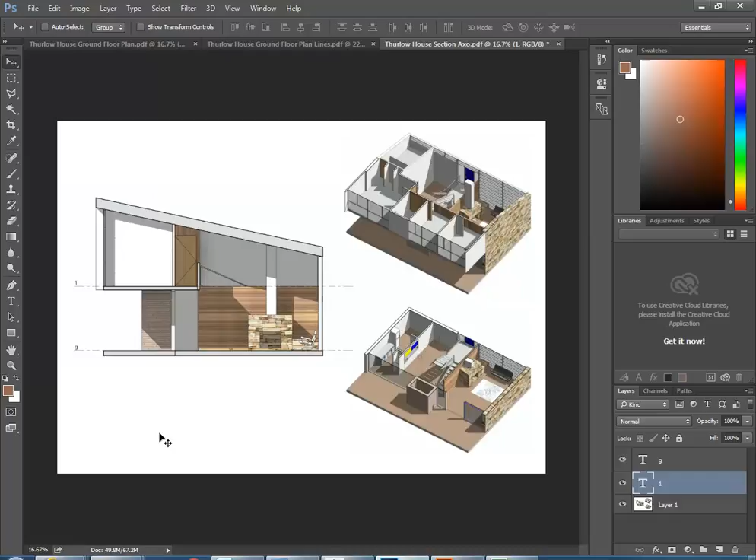Photoshop works only with pixels. So if we zoom in here, you'll see these nice crisp lines we had in Revit have all been turned into pixels. When you print them out on A3 they'll still look okay because there's enough pixels. But think about what would happen if this was an A0 board - we'd have a huge sheet made up of pixels divided into a big grid, and that makes it a massive file. In InDesign or Illustrator, you won't have everything stored as pixels, you'll have lines, which are much easier to store and look better too because they're clean no matter what resolution.

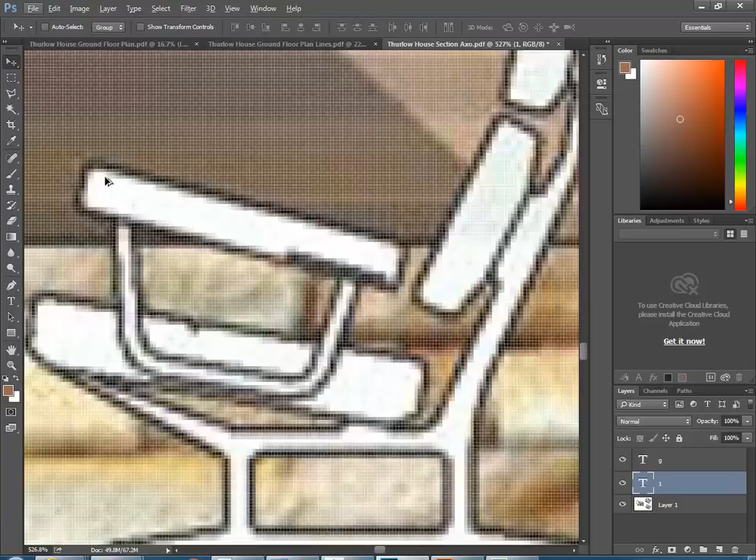So that's why generally for larger sheets you need to use those different programs, not just Photoshop. But for smaller pages you can get away with doing all your boards in Photoshop. So like I said, it's always working with pixels in Photoshop, but that's not a bad thing - some images should always be pixels.

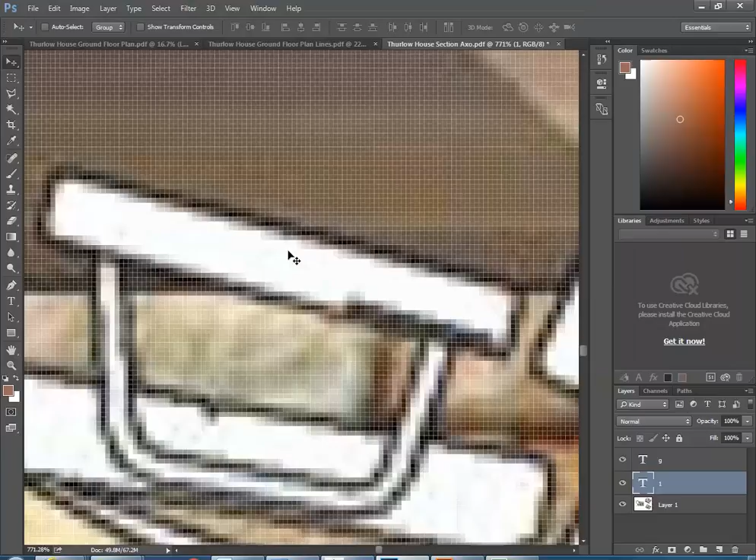A good example of that is those images of rugs I just showed you. So let's get one. Here we go, rugs - and that's the one I used in the end, I think. Yep, that's it. It could be higher resolution, but I'll just go with this one.

So what I want to do is make a mask, and that's a common thing you'll use in Photoshop, but you'll see Revit can also use these. A mask basically is something, often black and white, that's going to cut out part of an image.

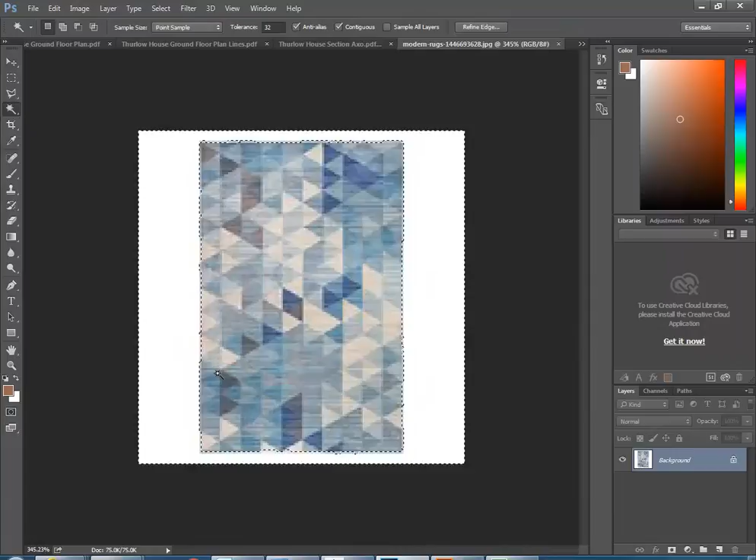This is a very easy thing to start with in Photoshop. Using the magic wand, I can select all the white. Then go to Edit, Fill - notice I'm not using the paint bucket because it works a bit differently. I'm going to change that to black, click OK, so I've filled in all the white stuff with black.

Pretty simple. Now I'm going to go to Select, Inverse - that's going to select everything except what I've just selected, so everything except the black. Then Edit, Fill, and set that to white. So I've made this image white where I want to see my rug and black where I don't want to see it. That's it.

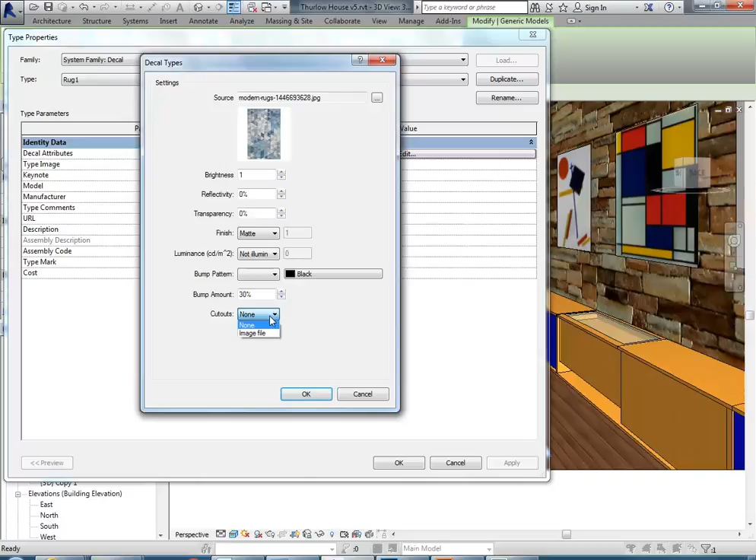I'm going to go Save As and save it into that folder with the same name, Mask, at the end. Now back in Revit, I'm going to select my decal, go to Edit Type, edit the decal, and you've got an option here for cutouts. So I'm going to choose Image File, Browse, and choose my mask file.

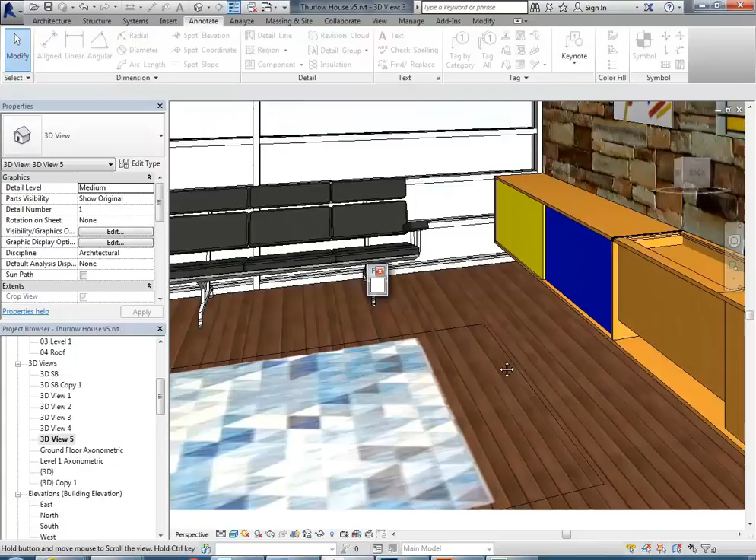There we are. And that way you can have cutouts or shapes for your decals that aren't just rectangles - you can have any shape you like, and that's really useful for things like rugs. Just having that uneven edge will give it a really organic look that will even work well for renders.

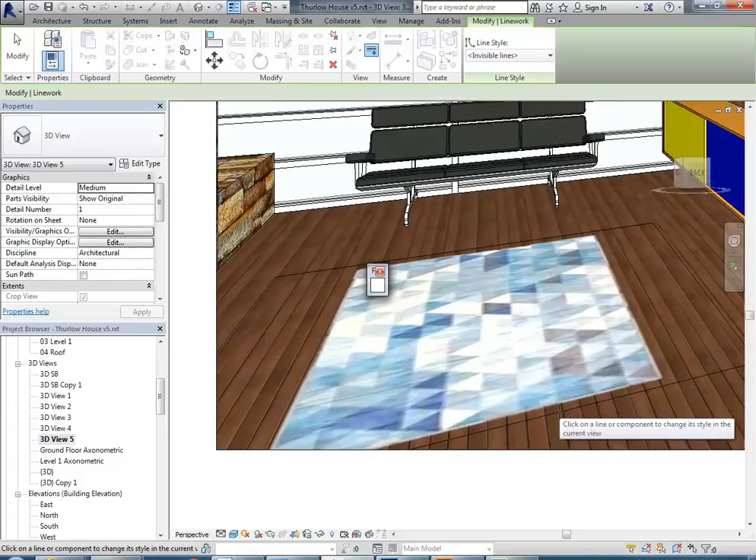Okay, you won't see that border there in the renders. If you want to take it out of these views you can try hiding it - but actually, no, I don't think that'll work. Anyway, in your renders you won't see that, so don't worry too much about it.

So you can probably realize already, Photoshop is really important for decoration projects - I'd say at least as important as the CAD software as you go further with different decoration. And you've already got to do it for your window treatments - you'll need to use Photoshop, I'd say, rather than Revit for most of that.

You'll go further with it in your next subject, of course. But I'll probably finish up there unless anyone's got any questions about Photoshop or layouts. Yes, oh yeah, of course, yeah. That's all good? Great.